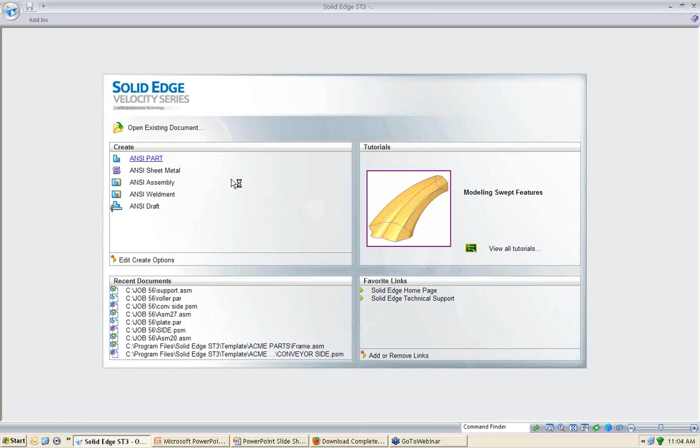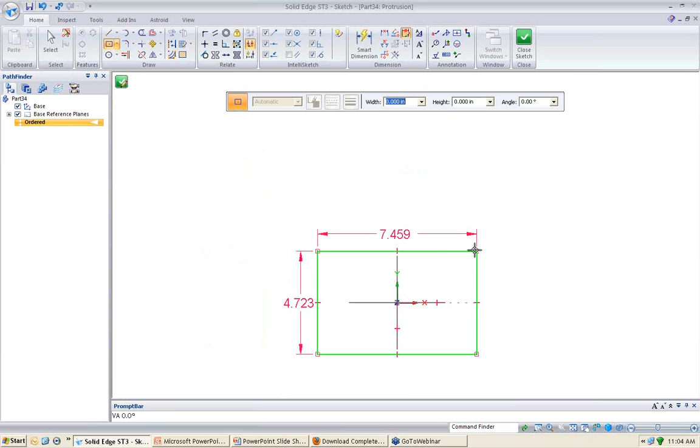Just a brief example of what a smart part would be. I've got a plate. I'm going to design a plate here just very, very quickly, and I'll just show you what I was talking about. Very, very simple plate. I'm in the Solid Edge ordered environment. You can do this in synchronous as well. And I just want you to see this plate right here, and we'll make it 5-inch by 8-inch.

And we'll make this plate 1/4 inch thick. So we can already see that the parameters are starting to show up with this, in that we have a 5 by 8, and on the side over here we can see that we have a 1/4 inch thick. So we see that those design parameters are already there.

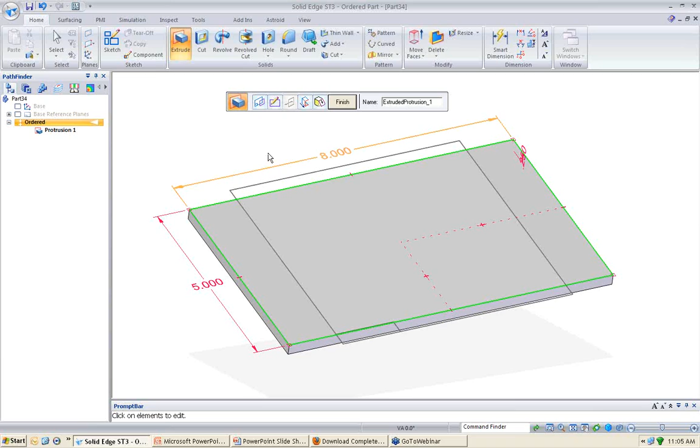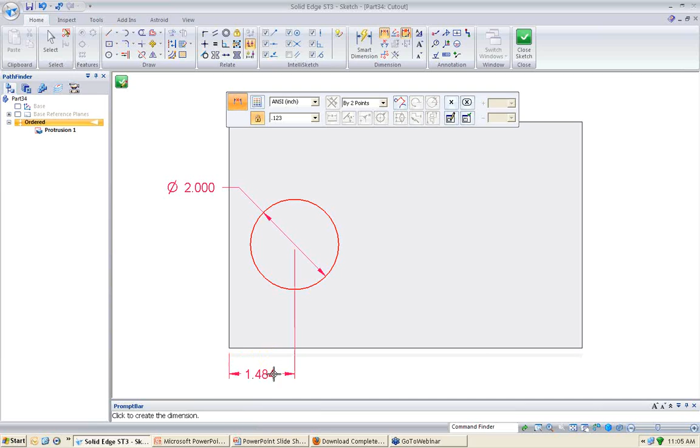So we might go ahead and make a cutout in this plate of a certain size. We'll make that 2 inch, and then we'll position that the way we want to. We'll say maybe 2 inch over.

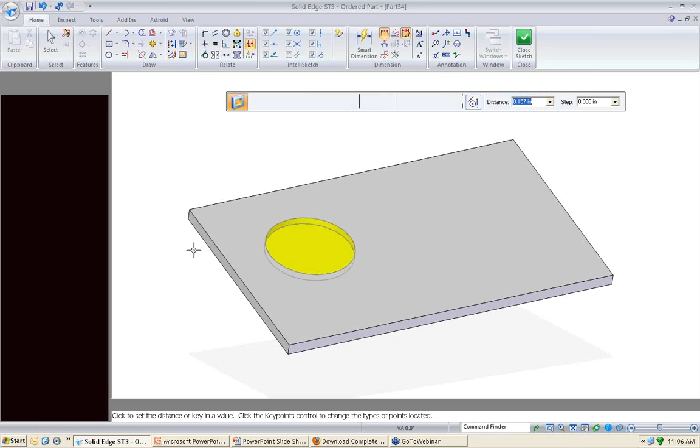And then we'll say maybe 3 inches up, something like that. So that cutout understands what we're proposing here, that we have a cutout that is 2 inch by 3 inch, 2 inch in, 3 inch up, a 2 inch hole. Now, any one of these can be corrected or changed at any time we want to.

So I'm taking my middle mouse button and just scrolling back and forth. Maybe we want this 2 inches down, 2 inches over, 2 inches up, 2 inches diameter. So we're taking what we already know and we want to use it as a smart part. We want to include all the parameters so we can use that again.

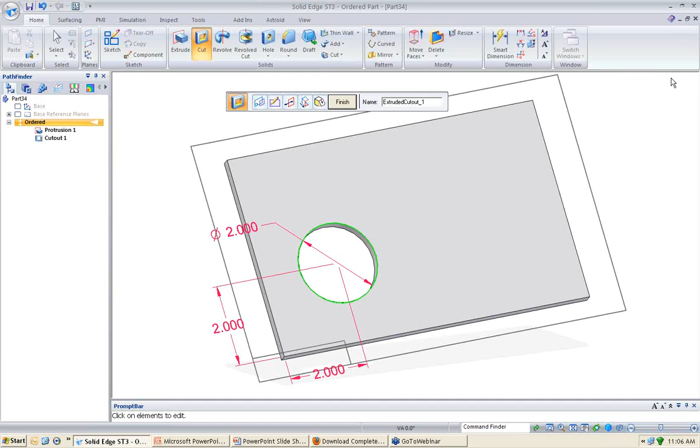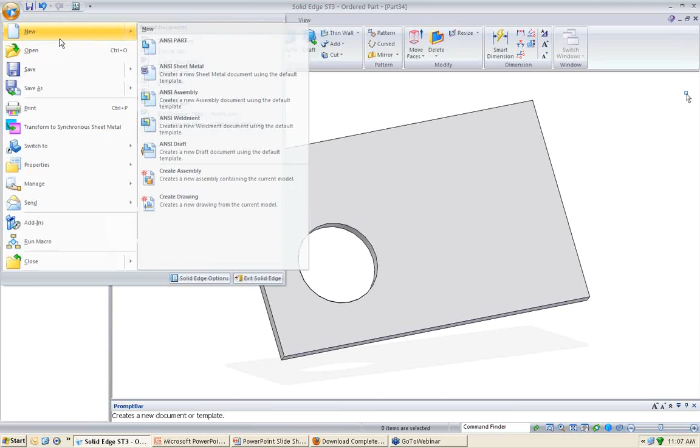In order to do that, we just save the part down at the template level. Wherever your templates are, most people's are out on the hard drive, some are on the server for multiple users, and you can put your smart parts out there. I've created a few new smart parts myself, and in my template folder I have a folder called a smart part folder. Looking at that folder gives me things I've already laid out in the past.

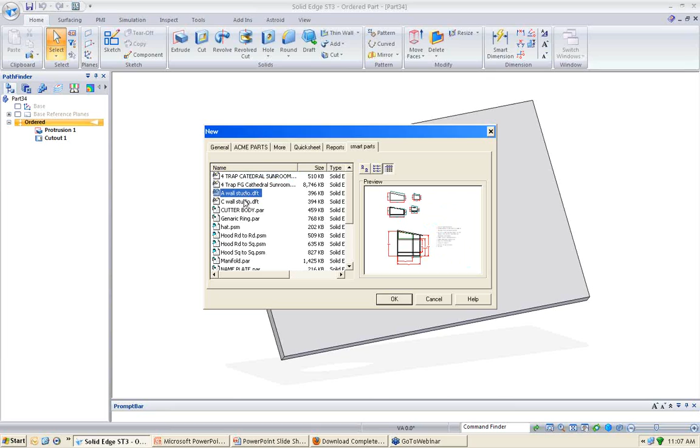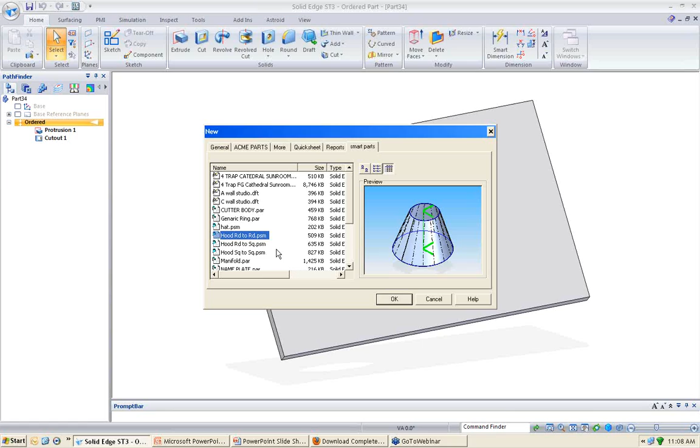So as I look at my smart parts, I have some layouts I've already done. I've got a cutter, a 3D cutter, a generic ring, and some sheet metal that we use to cover motors, light bulbs, belts, and things like that. So instead of drawing that, all I have to do is just bring that up. Solid Edge also provides, not many people know this, other things such as funnels and hoods inside the sheet metal environment. Here is a round to round, here is a square to round, and here's a square to square. Now all of these are completely drivable, the way you're going to see me demonstrate this.

So I've switched over, and I've got some of my parts, and I'm going to give a live scenario here, and in this case we're talking about conveyors. I'm going to design a conveyor live in this, hopefully in this brief 10-15 minutes that we have. So I'm going to pull up my conveyor side.

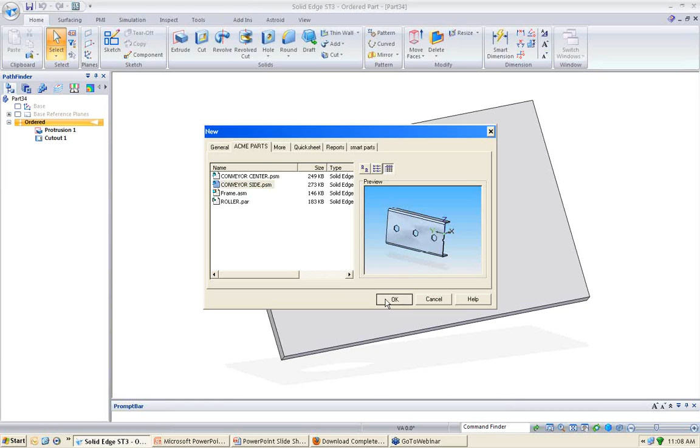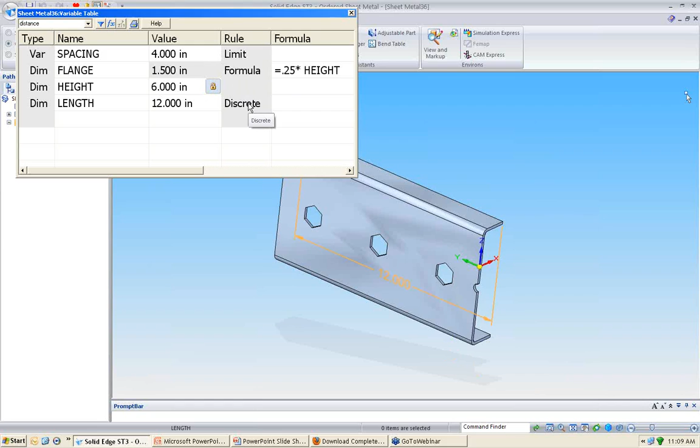Now this is a template piece. It's setting out there, it's a smart part. Those template pieces are controlled or accessed by our variable table, and I want you to see the different types of rules that we have out here. Here's just a limit dimension, we'll talk about that, and then I have a formula, and then I have a discrete list or predefined length, if you will. So I'm going to move this out and just show you very quickly how I do this.

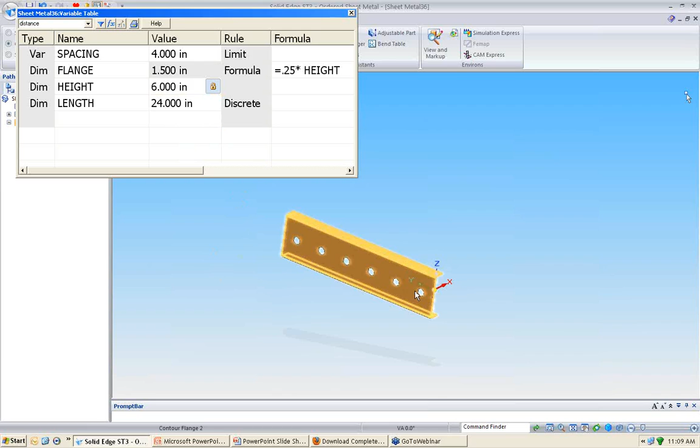And I've already got this set out to where I might want this piece 24 inches long. So just by clicking on that 24, the part now goes to 24. Notice that the holes, which we've taken time to pattern, will follow, because this is what's going to hold the rollers of our conveyor. So if I want a 24 or if I want a 48, I get the exact length I need, and I keep my design parameter that I've been asking for.

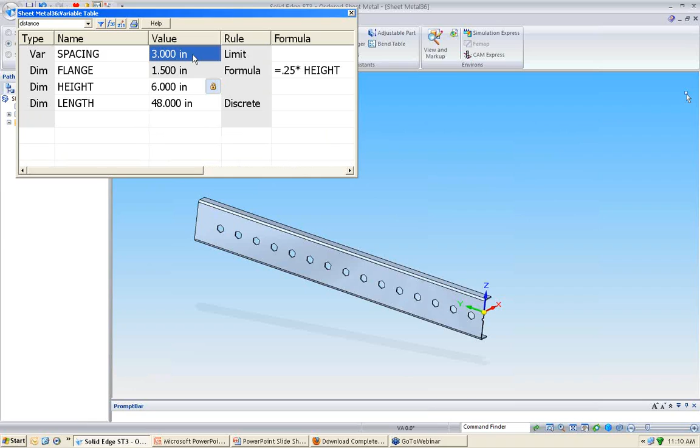It has to be so long and then spaced out every 4 inches. Now, I also get to control the spacing. I've got that set at 4 inches, but if I set it at 5, I would get a different type of spacing. If I set it at 3, I would get more holes in there, and if I set it out at 6, we're going to get a different spacing altogether as well. So again, I'm controlling this part the way I want to, the way my spec sheet or my job or my quote is requiring me to do that.

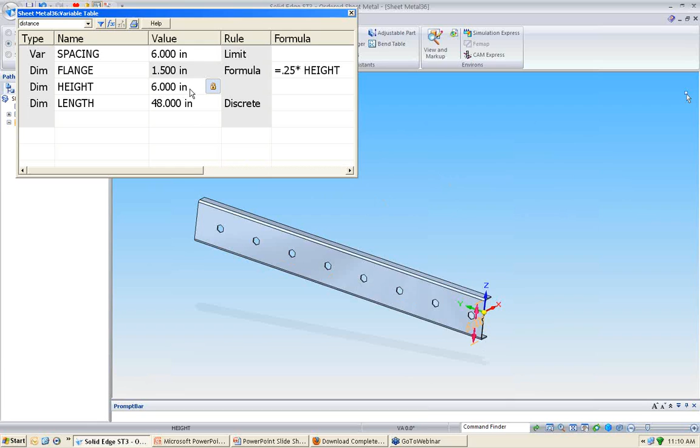So I may have that with the spacing. Now, with the height of this model, in this particular one, just for illustration purposes, I have a 6-inch height.

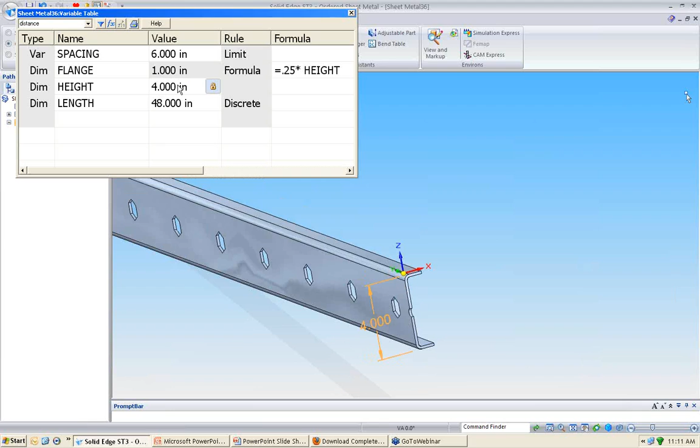Now you may notice that this is up in gray. My flange is 1 because my formula says it's going to be 25% of my height. So therefore, if I change my height to 5, not only do I change my height, but I also change my flange to 1.25 inches. So if I change my height to 4, I change my flange to 1 inch. Anything like that that you want to set up can be had according to your design parameters that you need.

So I'm going to go ahead and save this. And since this was a template, it now asks me how I want to save this part, so I'm not overriding the original piece. The original piece is safe down in the template folder. I get to pull this up and use it again.

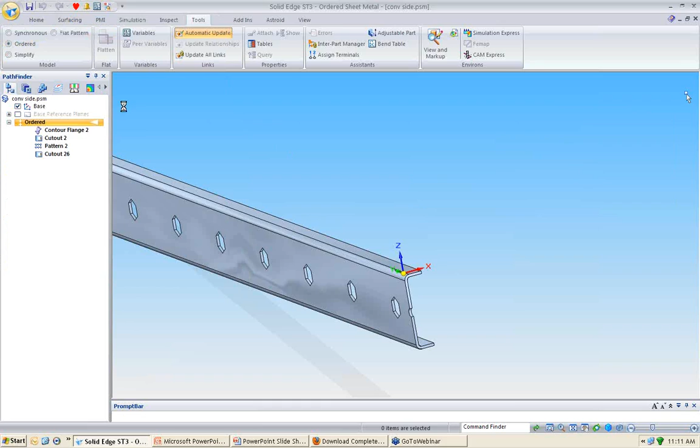If you see that real quickly, as we go to our Acme parts, here's my conveyor side that's not changed at all.

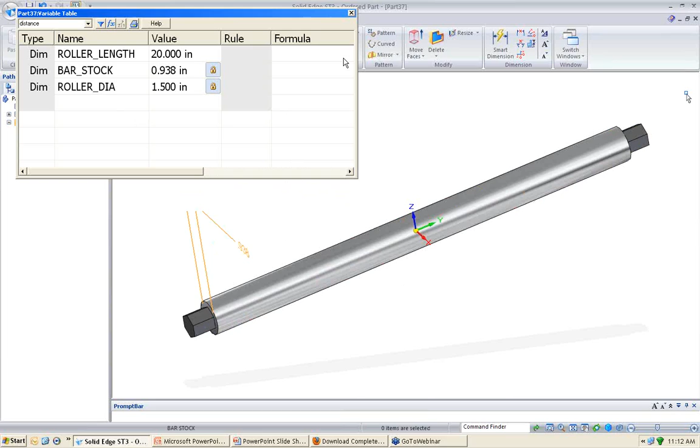So I'm going to go out and do the very same thing to my roller and save this off before, again with my variables, just looking at this. I want a roller length that's perhaps 20 inches long and maybe 1.5 diameter. Anything else that I care to change about that, I can change. Maybe this bar stock needs to be a little smaller. We'll see how that plays out in the end. So I can save anything that I like.

So I'm going to go save that, and this is going to become my roller.

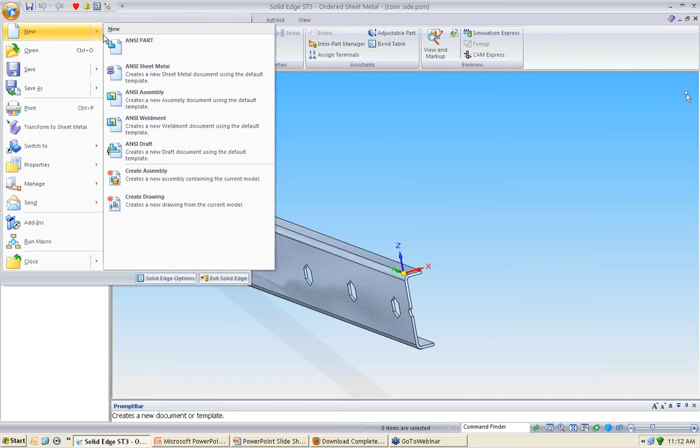At that point, we want to go back to our conveyor side and go to the new button, just as we've been doing, but this time we want to go create an assembly. So now this part becomes our first part in our assembly setting, waiting for us to finish building that assembly. And I'll take the roller that we have and bring this out.

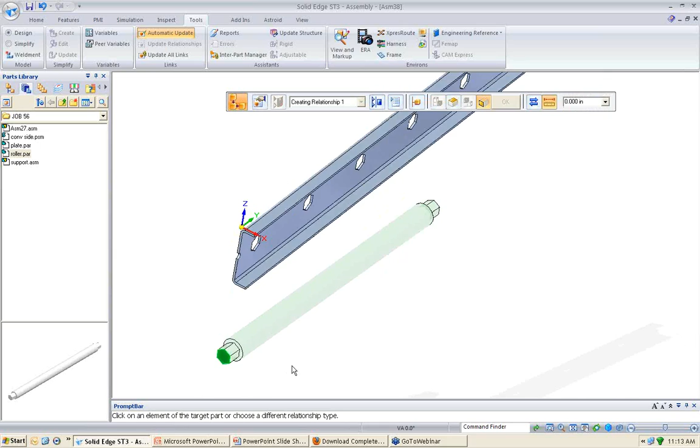And we'll go ahead and put this in, and we'll do perhaps a planar align, and we'll say it's going to be a half inch off of that surface right there, and then we'll mate or put these pieces in place.

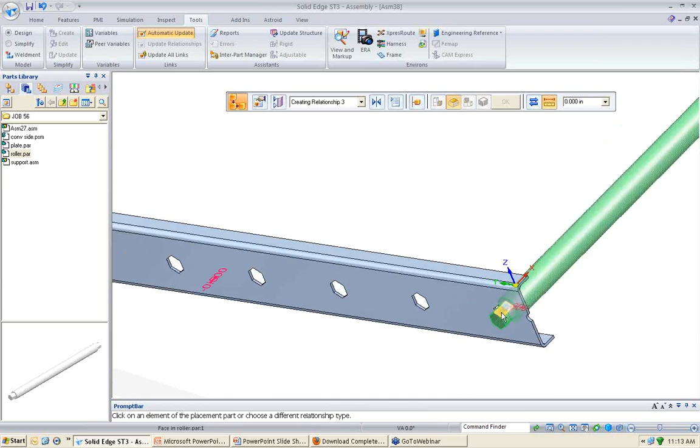Zoom in here real quickly. It's going to go there, and I'll mate that piece up to there. So that roller now is going to be in position to give us exactly what we want.

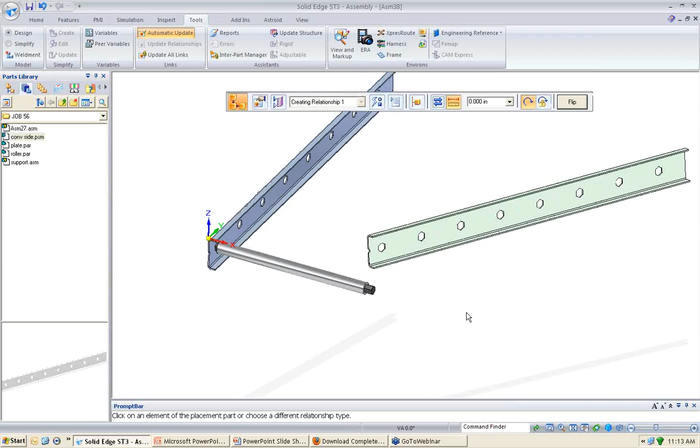Now I'll take my other conveyor side, that just so happens that these sides are the same. So I'll take my other conveyor side and bring that in. And you see that it comes in backwards, or the same as this part, which is fine with me. Very easy to do that again.

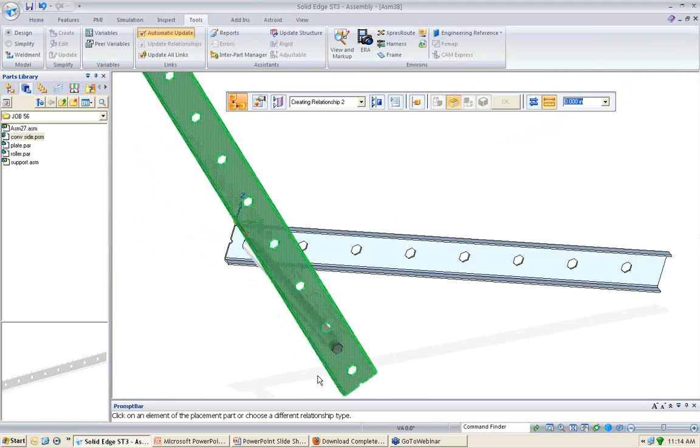I'll just simply planar align this piece, and we'll go a half inch off of this piece. And then for this reference, we will go planar align this piece up to there, and then this piece to this edge.

So now that I've got the start of my conveyor sitting out there, giving me exactly what I want.

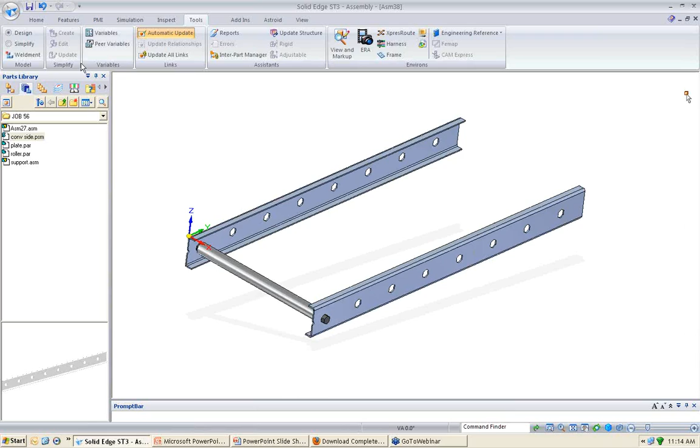While I have that, because I've spent that time on patterning and not just putting holes in randomly and trying to make that work, now it's very, very easy for me to take this roller and to just simply pattern that roller and put those rollers in as we speak. So I can put that roller in, and many times it will fall right into the holes that were patterned in the first place.

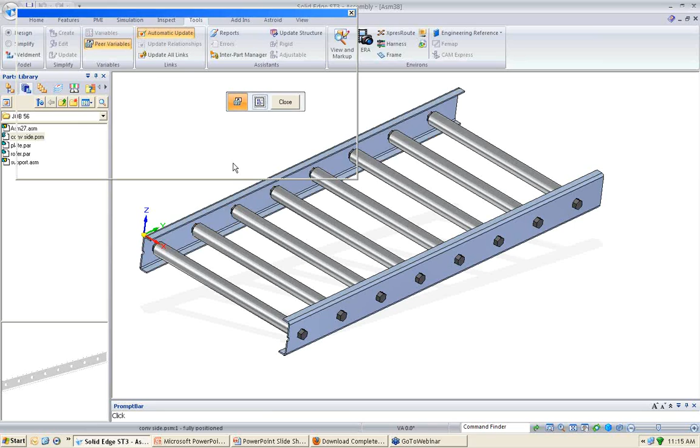Now, because we took those smart parts, and because we took the time to give that knowledge that we were looking for, I can now start to work with my assembly even right here. So this is a thing called Peer Variables. It allows me to look down at this part inside of the assembly as I work on that.

So for instance, I might choose now to go, I don't know, maybe 96 inches, and we'll take that out there as 96 inches. And then we might look at this, and I need this at 5 inches tall. Now you'll see the model look like it needs to be rebuilt. It'll automatically rebuild when I'm done with this spreadsheet. And then the spacing, I wanted them every 4 inches.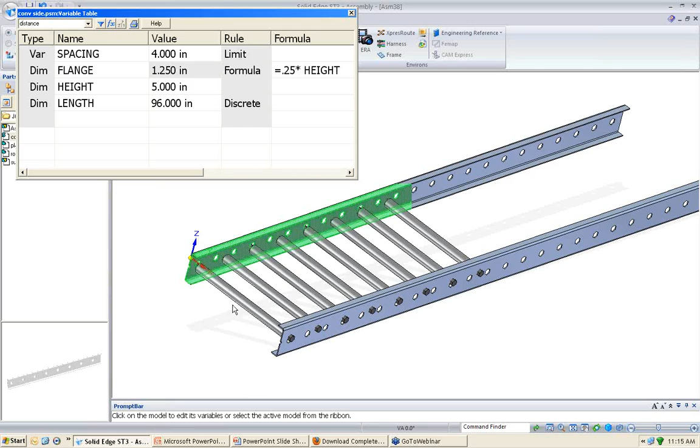The nice thing about my peer variables is while I'm working with this side, I get to go over and touch the roller. So now I want maybe my diameter of my roller to be 2 inches. Maybe I want this 24 inches wide, and so now those rollers are going to be wider. Not to worry, Solid Edge is going to rebuild that conveyor exactly the way we want, because each part corresponds to the variable table or spreadsheet we set up for that. So it's going to go out

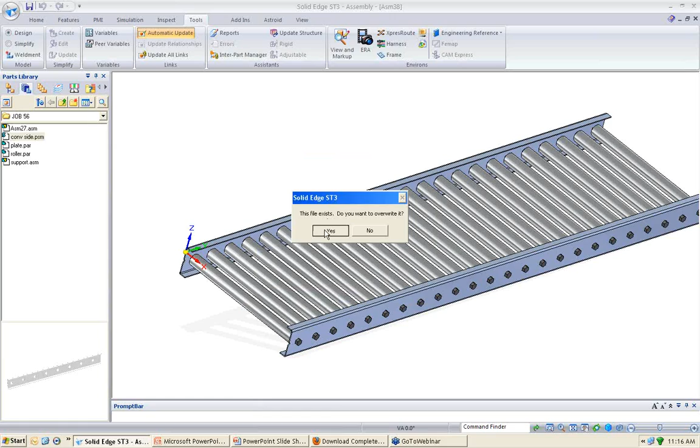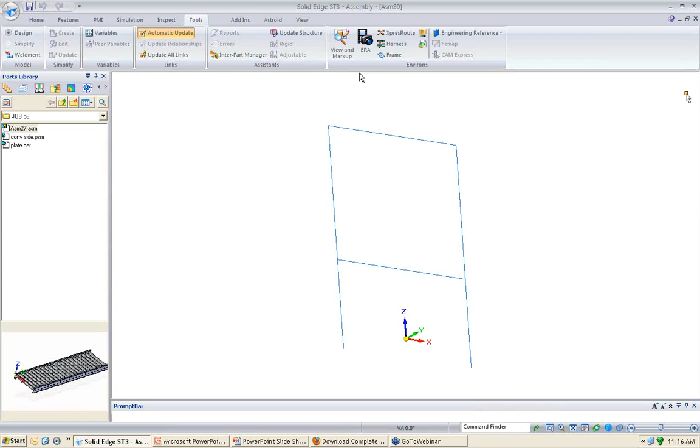So we'll take this and give us exactly what we want. Then very quickly, we worked with a part, we worked with sheet metal, and now I'm going to do a smart part as an assembly. So I'm going to take this frame that we have out here and simply run

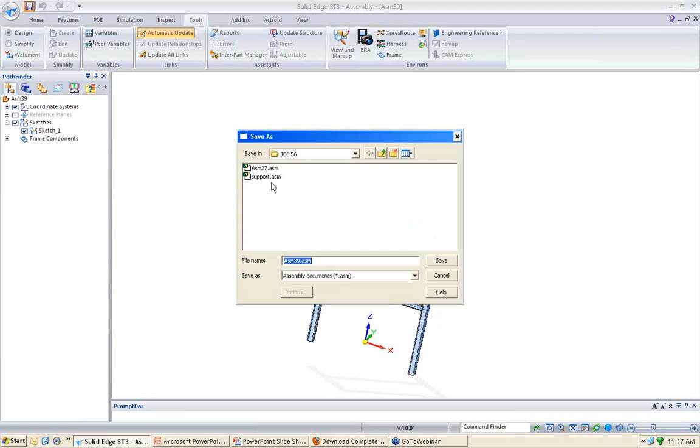this structural member all over this piece right here. And as I have that, it's no problem at all to take that sketch and see that it's designed at 20 inches, 30 inches, 12 inches right here. Again, we can change that any way we'd like because it's running off of that sketch, and we decided to keep those parameters in when the part was created. So, as I have that,

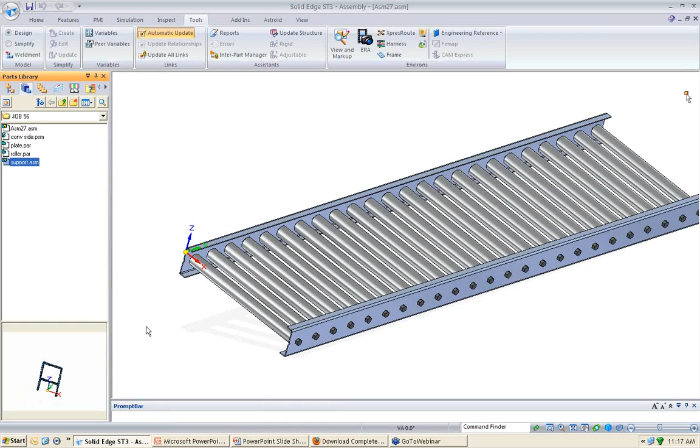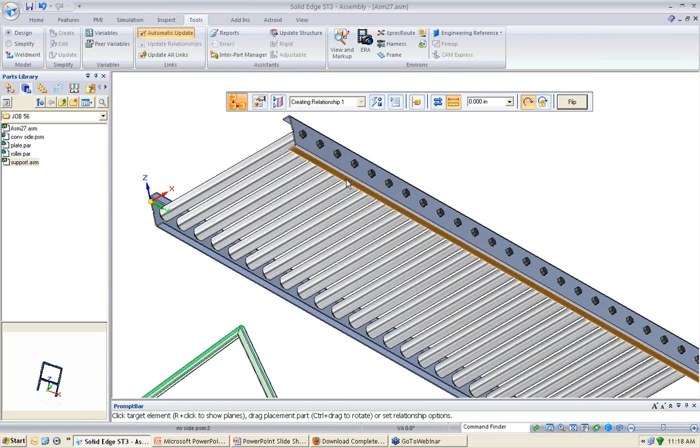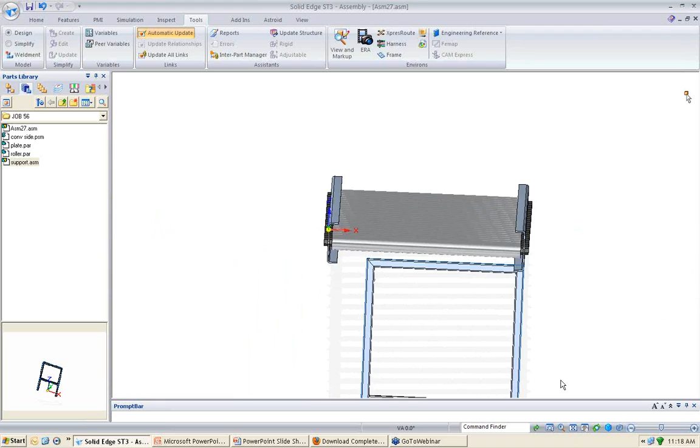now I can take my support and bring it in, and just quickly say that I want to take this face perhaps, put it down to there, this edge, put it to that edge, and then I'd like to take this face and bring it 12 inches off of the end. Now, if we see this, we can see very quickly that this is not wide enough.

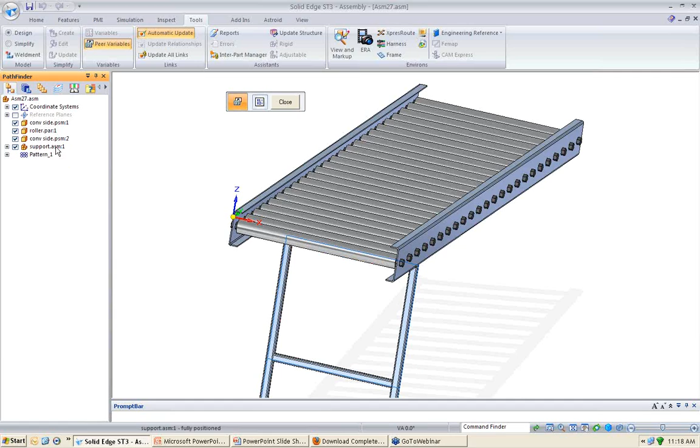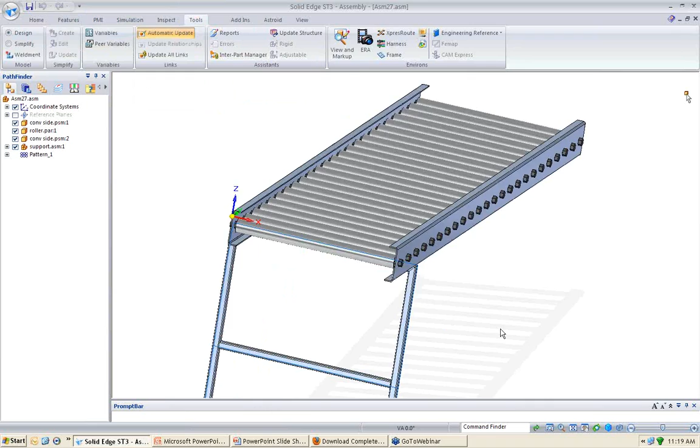Again, no problem whatsoever, because we kept our smart parts, because we used those in the beginning, allowing us to take the peer variables of that part and just simply change the width of that. If that's 24, let's go ahead and make it 28. Set it out like that. Solid Edge is automatically going to adjust itself to that.

So these are smart parts, parts that we use over and over again. They're just like this, only slightly different on the next round. There are more complex parts we can do, but for a beginning of this, we just wanted to show you how to do those smart parts, being able to drive assemblies, being able to drive parts based upon proven design parameters, the ones that you've already used.